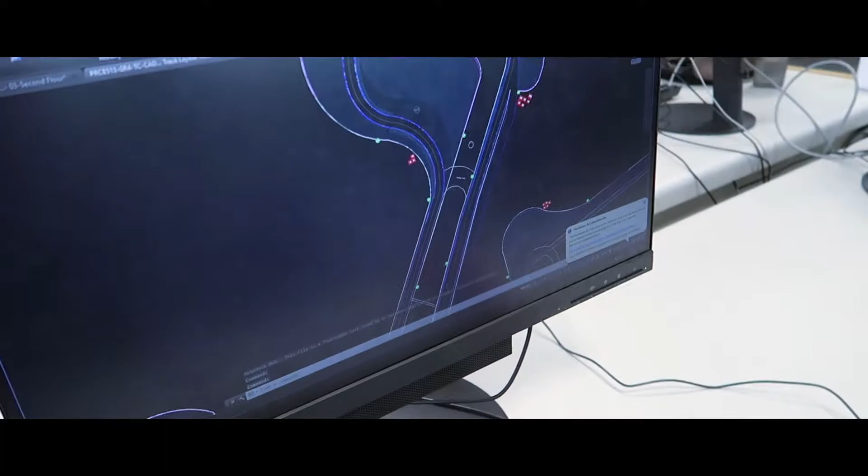CMC Engineering are a diverse team of young engineers who possess experience in a wide range of sectors and a passion for delivery of high-quality designs. The company was formed to fill a gap in the market of delivering world-class FIA-approved racing venues and associated developments. Our closely integrated multidisciplinary team made us ideally placed to deliver this to the highest quality whilst ensuring budgets and programme is maintained.

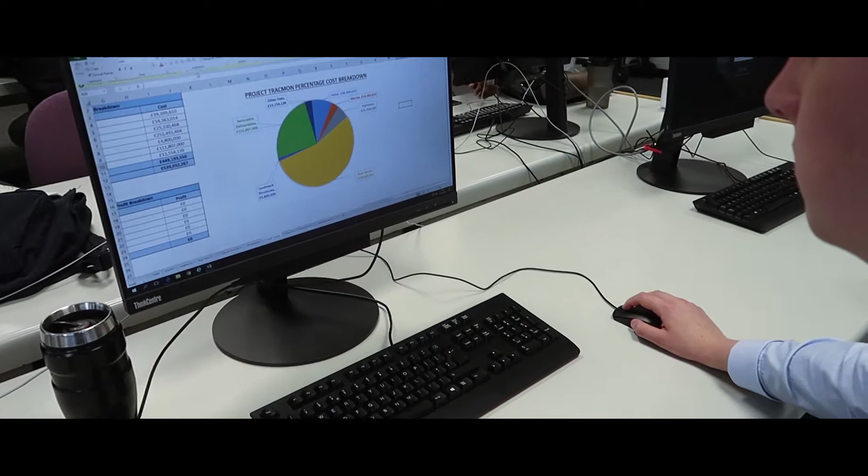As CMC Engineering's project director, I have had principal responsibility for ensuring the successful delivery of TracMôn. To ensure this, I act as the principal point of contact between our client and the team, thus guaranteeing a consistent approach between all our constituent disciplines.

To assist with managing our diverse team, Rosemarie Poad and Adam Carthew have been appointed as lead civil and mechanical engineers respectively. Our experienced team of civil and coastal engineers additionally comprise of Benjamin Robbins, Christopher Benson and Georgina Jenkins. These are joined by Adam Hawkins, Stuart Morton and Edmund Norris, our skilled team of mechanical engineers.

After extensive analysis of the existing site, it was found that a range of modifications were needed to ensure this venue will not only meet FIA regulations, but will also provide world-class facilities for the spectator. The current site consists of an 11-turn, 3.4km track, a pit paddock complex, racing school and medical centre. However, these facilities will need significant renovation to ensure they meet the extensive regulations set by the FIA.

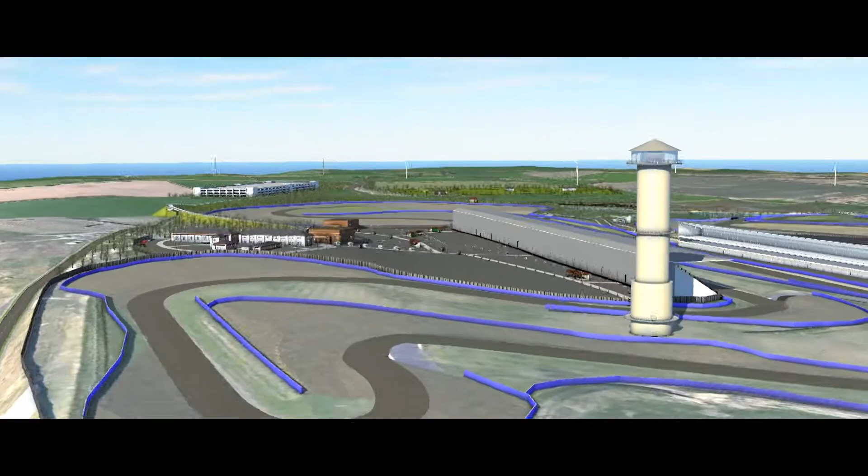Our aim is to sustainably design a world-class Formula One or Formula E venue. Therefore, the design of TracMôn will consist of an additional 1.5km extension of the race circuit, addition of permanent grandstands, the development of the starting straight and world-class pit paddock complex, and the addition of an FIA-approved medical centre.

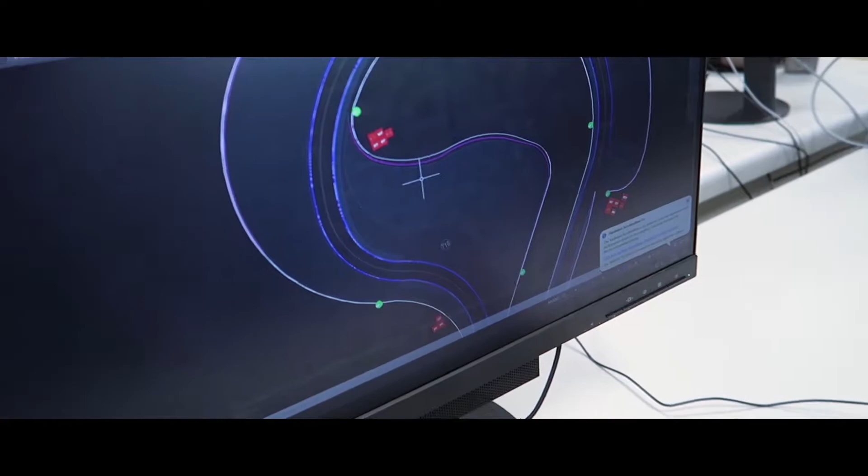These include the design of a marina equipped with oscillating water columns, a 5-star hotel and observation tower. Additionally, the design and development of supporting infrastructure has been provided to ensure that the expected capacity of TracMôn can be sustained safely and effectively, with renewable energy generation and upgrading of transport networks. Every venue must now meet exceedingly high track safety requirements, and that has had a major influence on the design of the TracMôn racetrack.

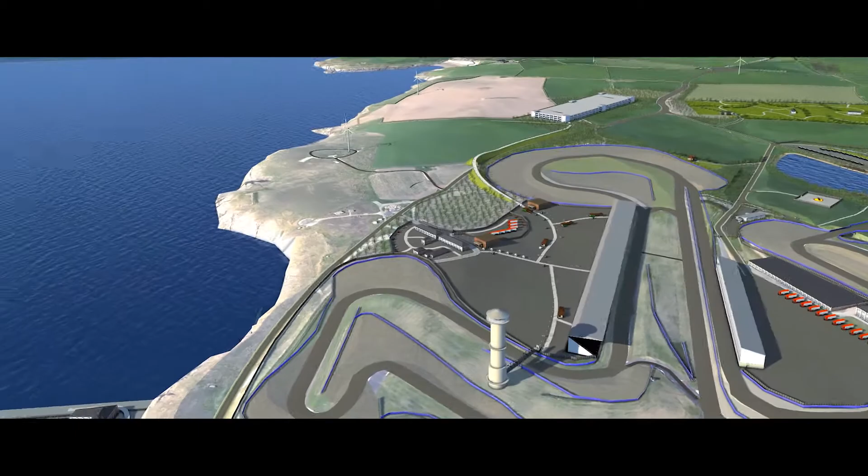The existing circuit is made up of several circuit layouts, the longest being 2.1 miles. This is adequate for an e-prix, but not suitable for Formula 1 Grand Prix. The track is already licensed with the Motor Sports Association and Autocycle Union, however the track extension will allow the circuit to obtain a Grade 1 FIA licence.

CMC Engineering's professional engineers have produced FIA standard drawings for the new circuit and are focused on maximising driver and spectator safety with positioning of run-off zones, gravel traps, high friction paint and TecPro barriers. These features are designed to decelerate a car when it is out of control, preventing a collision with track walls and barriers at speeds up to 200 km/h. Throughout the design process, CMC Engineering have worked closely with the FIA regulations to ensure that the circuit meets the highest level of safety standards achievable.

There will be 2 permanent grandstands, which will enable seating for 35,000 guests at one time. The permanent grandstands will have benched or folded seating and will be sheltered using a canopy roof. In order to accommodate the 75,000 spectators, temporary grandstands will also be used.

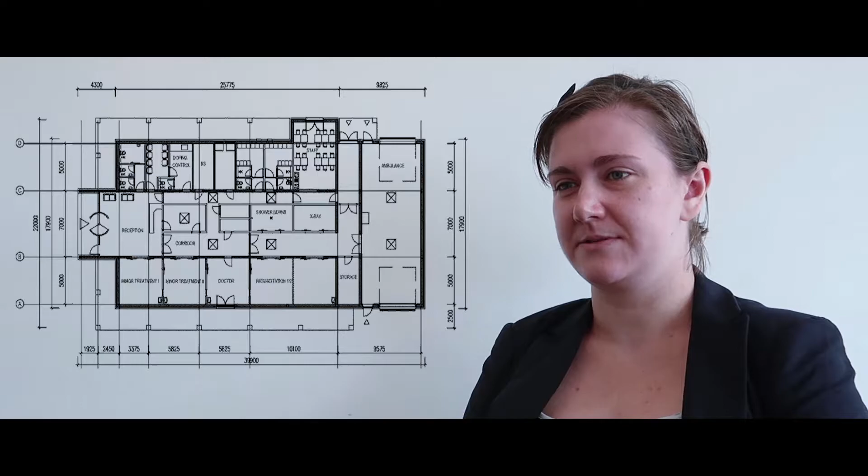It is required by FIA that a medical centre is provided on site and will include a burns unit, x-ray unit, as well as minor treatment rooms. Additionally, to ensure safe operation of TracMôn, a helipad will be required for rapid off-site transportation to hospital.

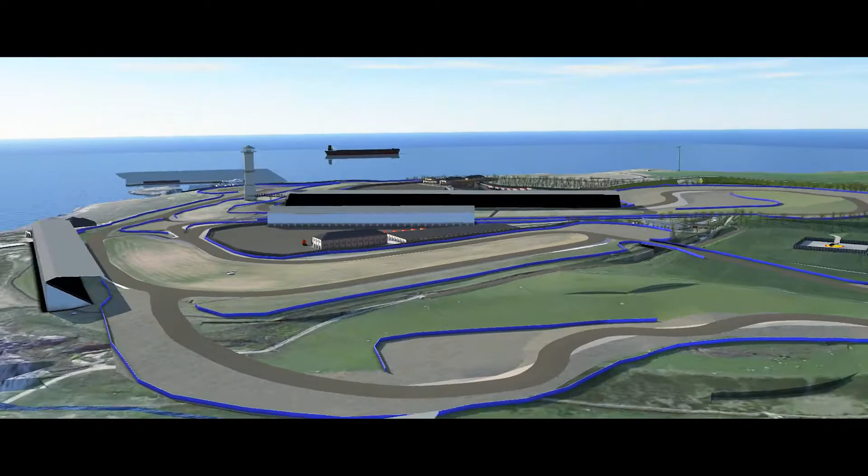Due to there not currently being dedicated parking areas at Anglesey Circuit, a multi-storey car park will be included on site. The car park has 4 storeys, with one level being underground, and will accommodate 5,000 cars.

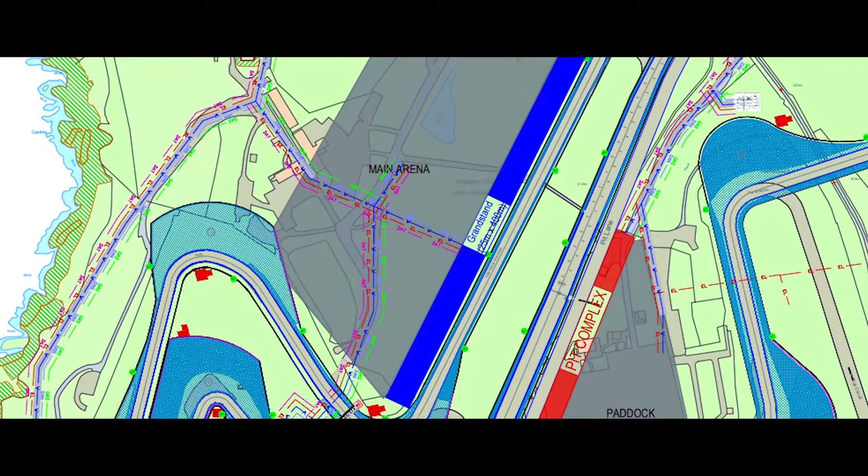There will be designated areas on site that will provide retail, food and entertainment, including a ticket office, restaurants and mobile refreshment installations. This area will be made available to hire during off-peak times to private functions and conferences. During large events, including F1 and FE races, there will be temporary structures, including additional food stores, in order to help manage the increased number of guests.

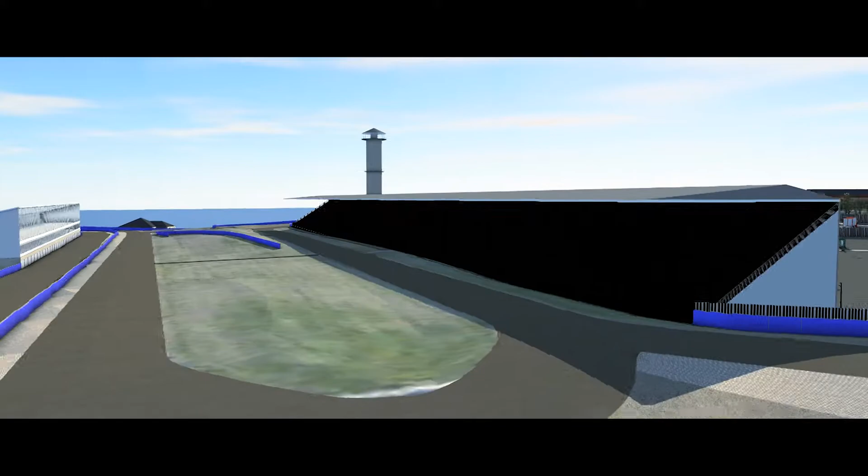The pit complex will be a 3-storey construction with 30 double pit garages. The pit complex will contain F1 and FE team garages that all include electric supplies, hospitality suites and media areas. Additionally, the top floor will include viewing terraces and private boxes overlooking the track.

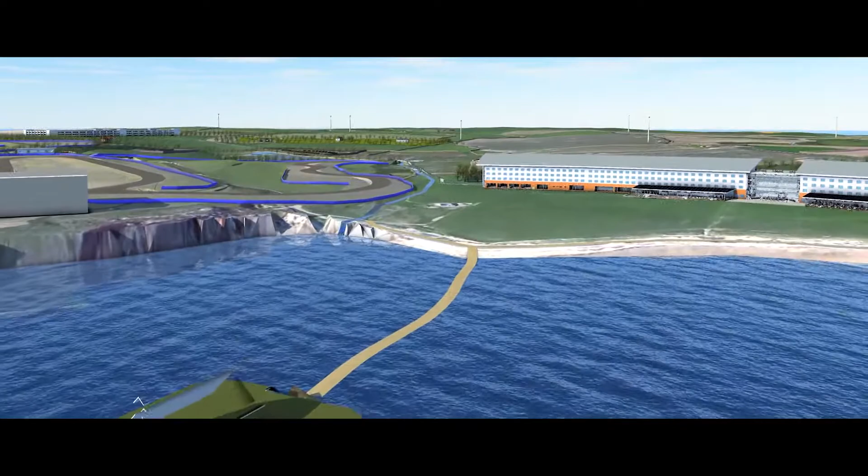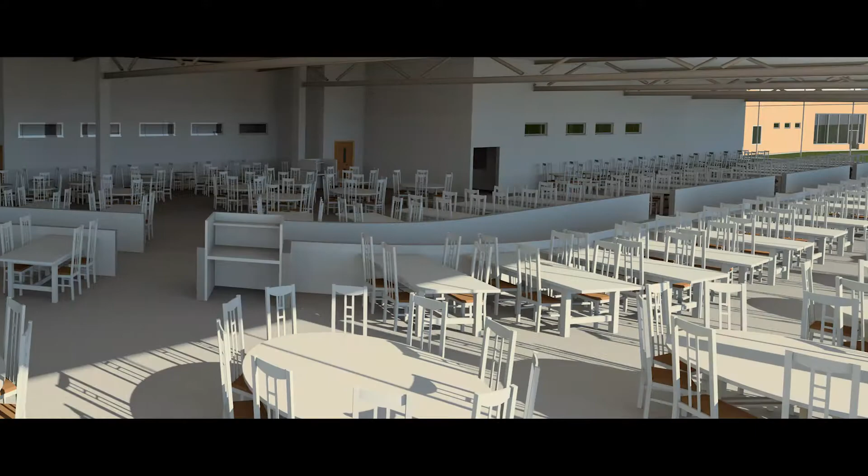To support the world-class venue at TracMôn, CMC Engineering have designed a high-quality 5-star hotel. The hotel includes a wide range of excellent facilities, including a large restaurant, comprehensive leisure facilities, and ample spaces to allow the hotelier maximum flexibility. 500 guest rooms are provided with a range of different room types to cater for the wide range of visitors expected to TracMôn. The leisure facilities include a gym, squash courts, bathrooms and swimming pool.

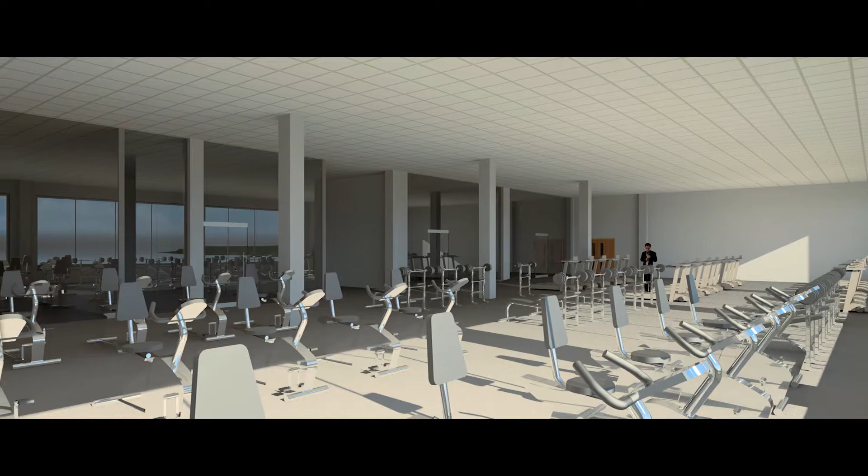An extensive range of function and conference facilities have been included to bring a continuous source of revenue to Gwynedd Hotel throughout the course of the year. These include a large, flexible conference space which hosts stunning views over the Welsh coastline.

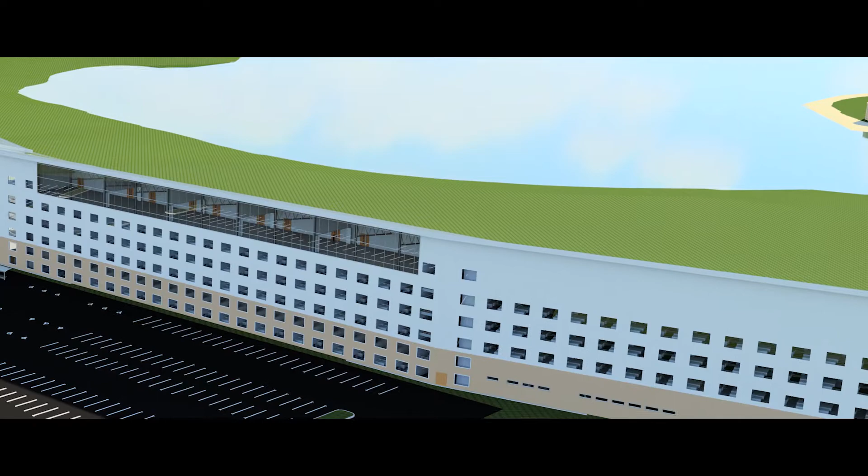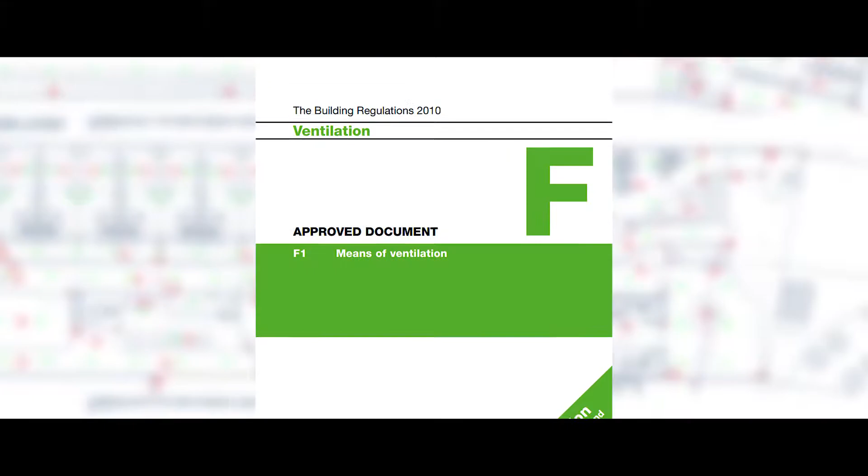To ensure customer comfort is maximised, world-class mechanical and electrical service has been provided. These services include HVAC climate control, domestic water, drainage and sanitary services, and state-of-the-art electrics, power and data connectivity. Each of these services has been designed to the highest of industry standards, working closely with CIBSE guides, BREEAM sustainability guidelines and relevant building regulations. Throughout the hotel, high-efficiency, low-energy lighting and presence detectors have been utilised to reduce energy usage, and high-efficiency condensing gas boilers have been utilised for all heating and domestic purposes.

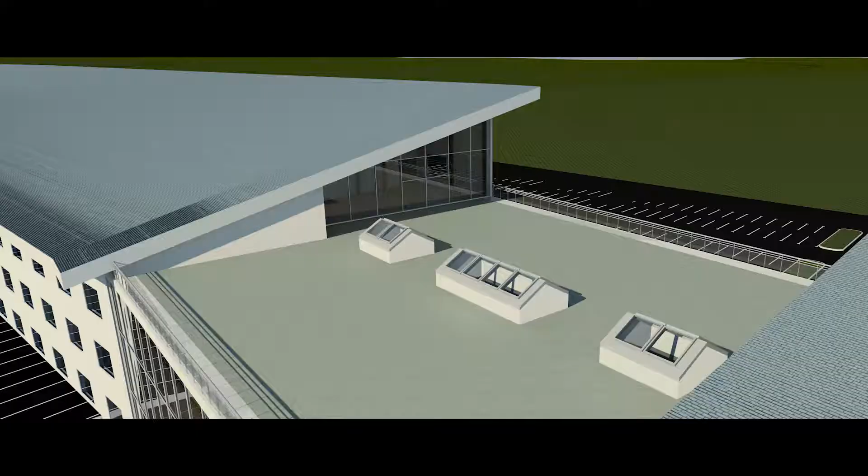It has been vital that TracMôn can operate sustainably. To achieve this, the engineering team has designed several renewable energy generation devices around the venue. These include the use of Tesla solar roof tiles, 1.7 megawatt onshore wind turbines and oscillating water columns. Tesla solar roof tiles have been utilised as they provide the most cost-effective solution without negatively impacting the visual aesthetics of the venue. Tesla solar roof tiles cover 65,000 metres squared at the TracMôn site, meaning the solar roof tiles will generate 3,000 megawatt hours per year.

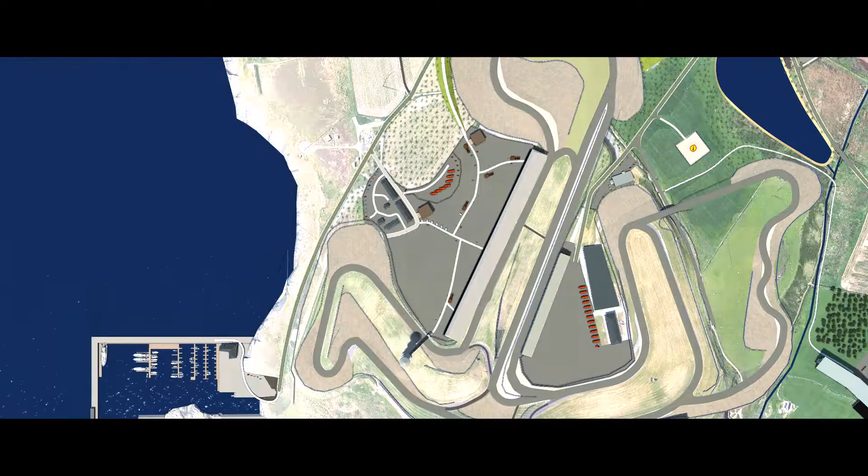Another source of renewable energy planned for TracMôn is a wind farm consisting of 10 General Electric 1.7 megawatt turbines. Each turbine combined can produce 37.23 gigawatt hours of clean energy every year. This is more than enough to power the entire TracMôn venue, and excess energy can be sold to the grid for added income.

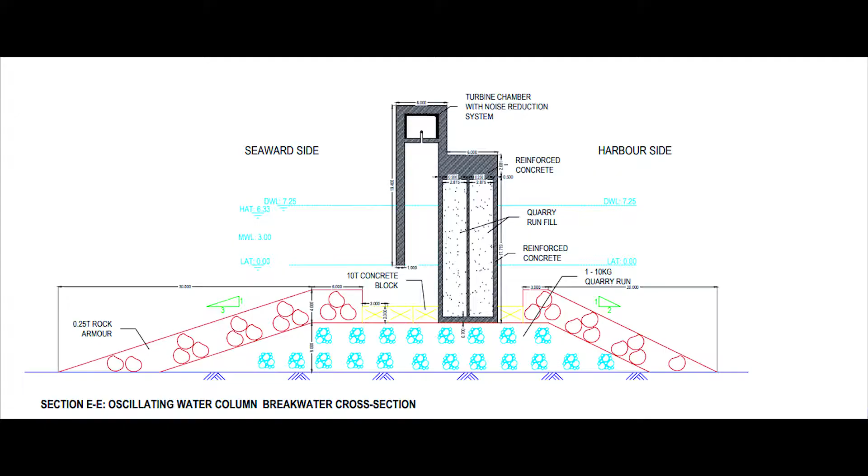Finally, TracMôn will utilise oscillating water columns as part of its marina breakwater design. 20 turbines will utilise the Anglesey wave activity with a production of 1.12 gigawatt hours of green energy expected annually. The breakwater has been designed with climate change allowance and provides protection from a 100-year storm event for the marina. The marina adds an exciting dimension to TracMôn, and has been optimised to provide berthing up to 129 vessels, with 9 berths allowing for a maximum length of 30 metres.

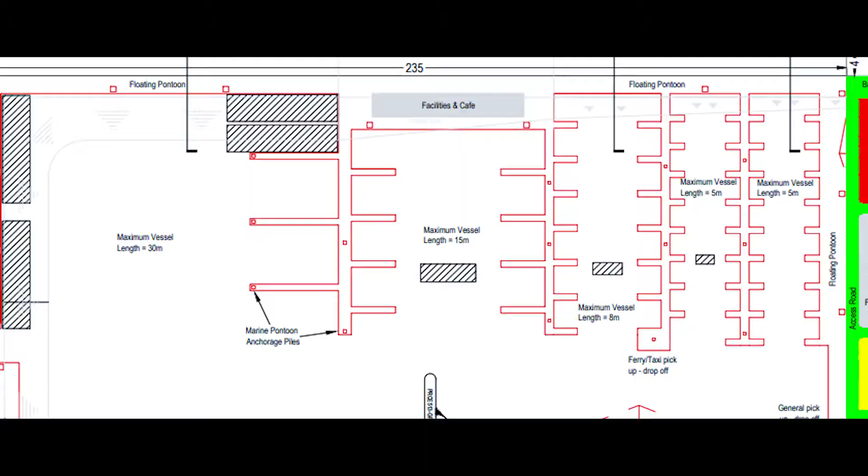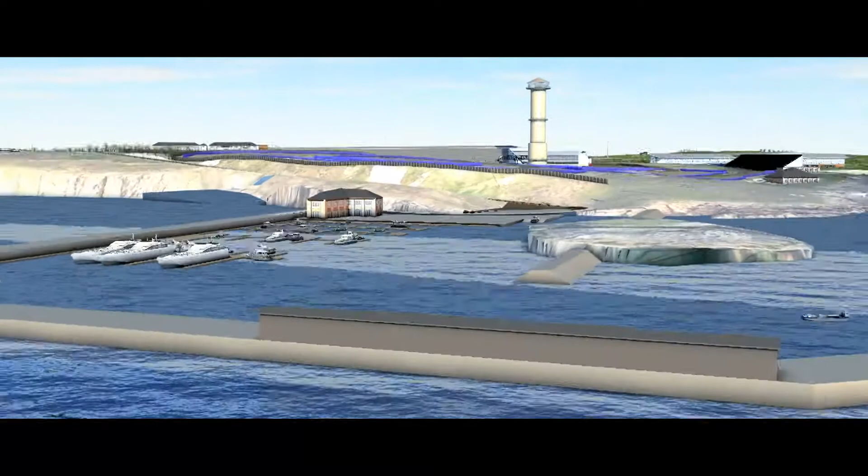The design has been aimed at accommodating elite clientele while future-proofing against the trend of increasing vessel sizes. The area of land reclamation expands the appeal and year-round functionality of the marina, providing retail, car parking and vessel launching facilities. The marina benefits TracMôn through an increased revenue stream generated as a direct result of marine operations, increased visitor numbers to the wider TracMôn site, and through the use and sale of renewable energy generated.

The landmark structures throughout the site have been implemented to provide focal points and iconic features. Standing in the middle of the track will be an observation tower with multiple balconies down its length and a bar area at its peak.

To connect the tower to the main arena of the venue, a composite bridge has been designed and utilised for its improved resistance to corrosion in the aggressive sea environment.

A new highway has been designed to cope with the influx of traffic to the newly developed racetrack. The new highway uses an existing link on the A55 North Wales Expressway and consists of 6 miles of newly built road running through the countryside, linking with already existing road. The new highway will ensure that vehicles travelling to the developed racetrack do not impede on the already existing infrastructure that will deal with everyday traffic.

The construction of the site has been estimated to take 3 years. Construction has been split down into 3 separate phases. Phase 1 consists of the hotel, track and external highways. Phase 2 continues with the remaining work on the hotel, composite bridge, observation tower and the internal highways. Phase 3 will finish the construction of the site, entailing the construction of the marina, the medical centre and the wind turbines. CMC Engineering estimate that the entire project will cost £539 million.

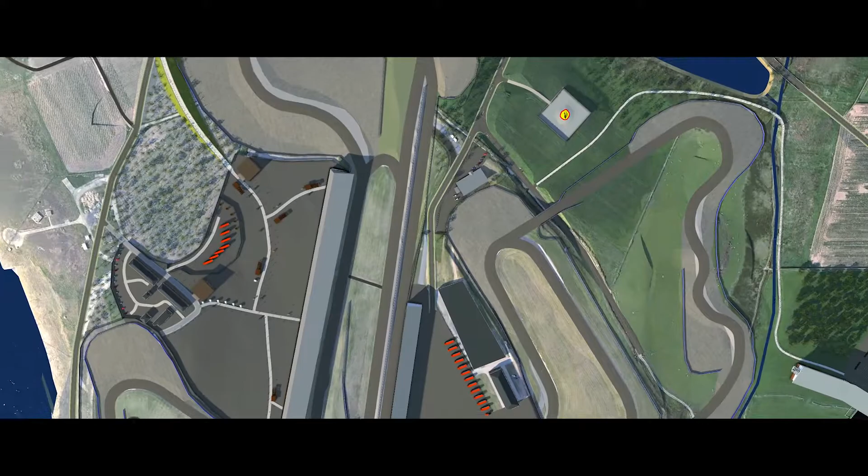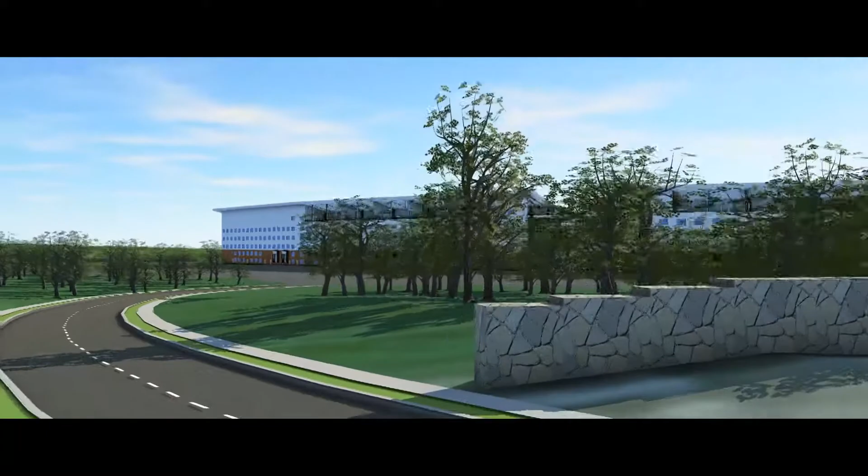It is hoped that the main contributor to this sum will be the Welsh Government, as they encouraged the development of the circuit in the past and have contributed funds for previous track improvements. The remaining funds will be obtained from private sources as well as potential track and car sponsors such as Pirelli and Rolex. CMC Engineering are in contact with Tesla and General Electric in regard to potential site-wide sponsorship deals.

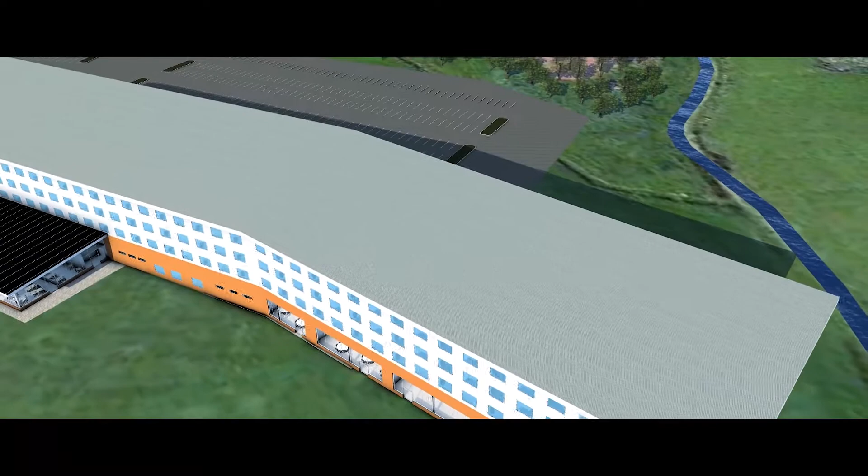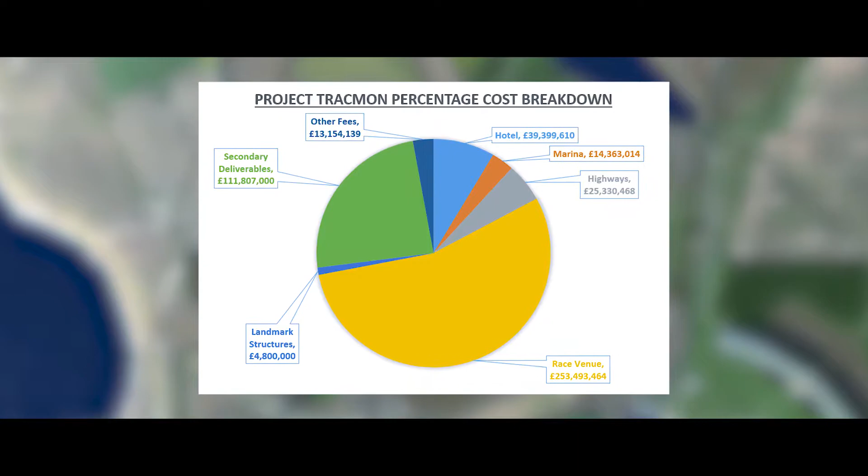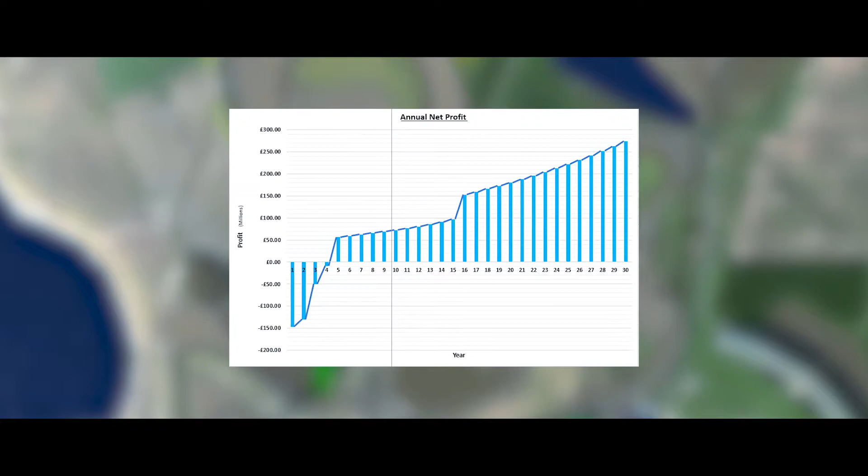It is necessary to conduct an extensive cash flow analysis that suggested that the project will start making a profit after 5 years of project startup and will break even after 10 years. All loans will be repaid by the 16th year of the project, 12 years after full site commission. It is estimated that the project will be making an average annual profit of £74.2 million, which will substantially increase upon final loan repayment. By year 30, annual profits could be as high as £270 million.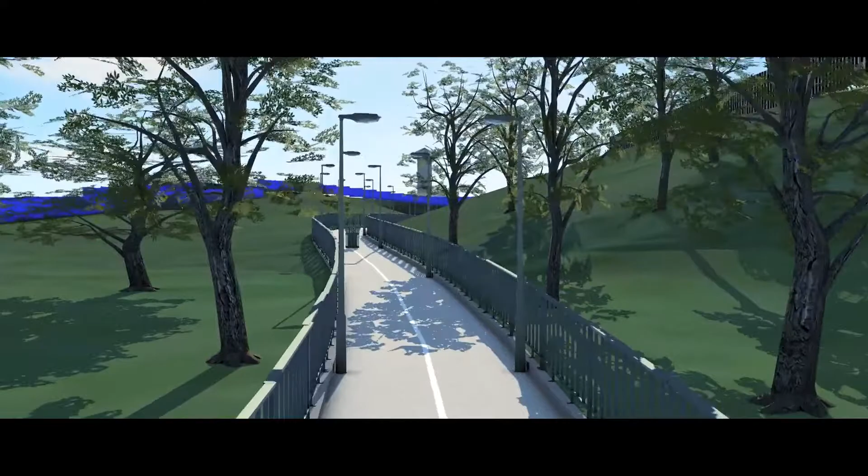A brief holistic assessment of the potential benefits of this project has shown the major impact the racetrack has on the local economy. It is expected that the TracMôn redevelopment will increase the benefits seen by local business. With increased visitor numbers anticipated, facilities further afield will benefit from the track-related events.

The structures that have been planned out will also bring more employment opportunities for many people in the area, not just during the construction aspect, but the hospitality sector too, providing sustainable and stable employment within the area. The development also presents opportunities for new businesses to be created within the area to provide leisure and services to locals and tourists alike. A SWOT analysis was produced outlining the strengths, weaknesses, opportunities and threats of the project.

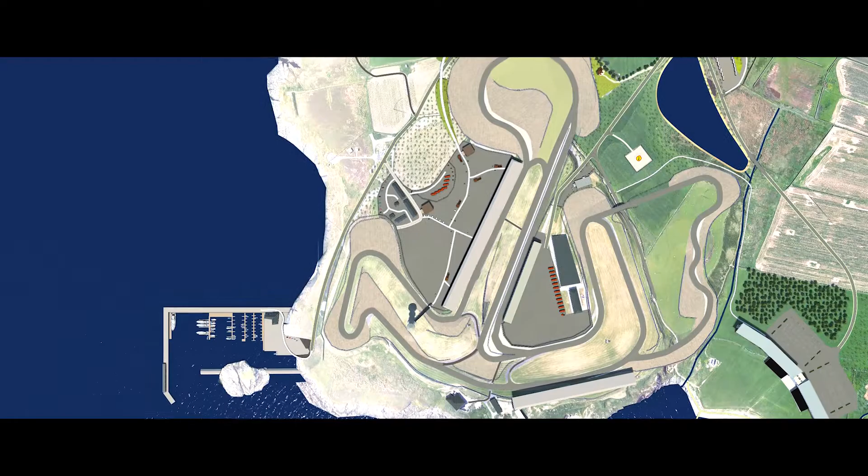The main success factors for the project are the knowledge that Silverstone are terminating their F1 contract, therefore increasing the opportunity for a high-profile track to be developed at Anglesey. Additionally, a strong cash flow is essential to ensure the project can be supported into the future. It is essential that CMC Engineering build strong relationships with clients and suppliers in order to help support the development and to build a strong reputation.

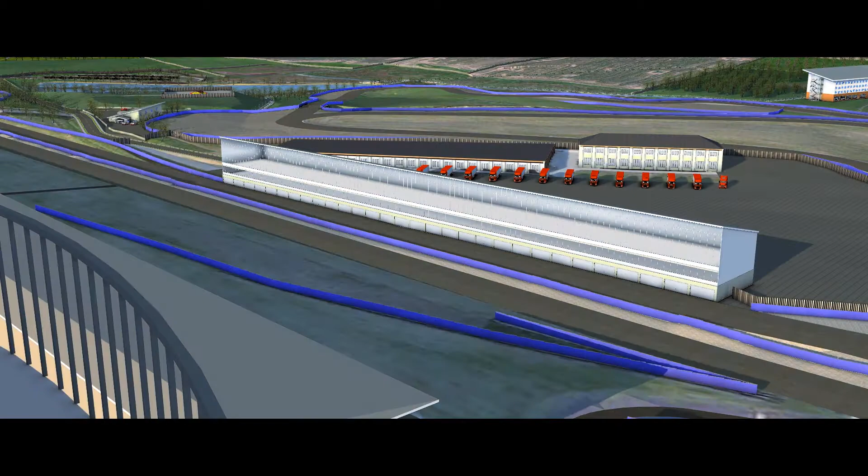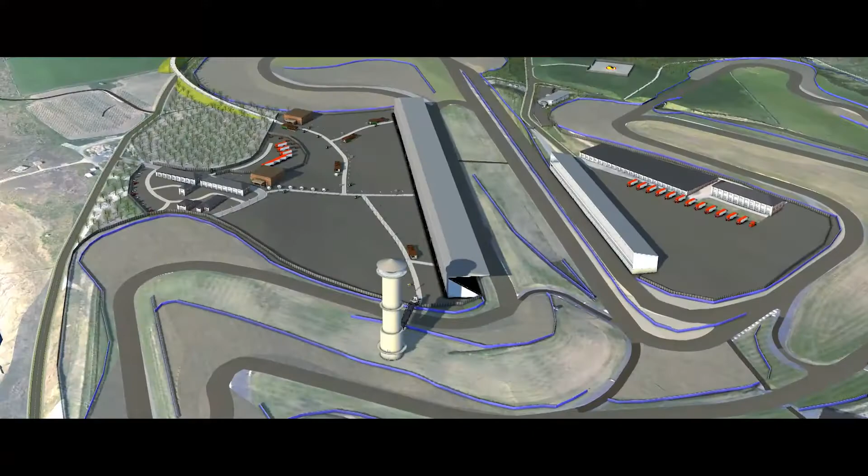Within this project, there are many avenues for risk. Whether these are personal or financial risks, CMC Engineering have taken steps to mitigate these, providing not only a safe site, but also a safe investment. For example, TracMôn is reliant upon not only one aspect. The marina, hotel and renewable energy have the capacity to operate all year round, providing a sustained income. Whilst the track activities provide a much welcome revenue boost, the project is not wholly dependent on race or track events.